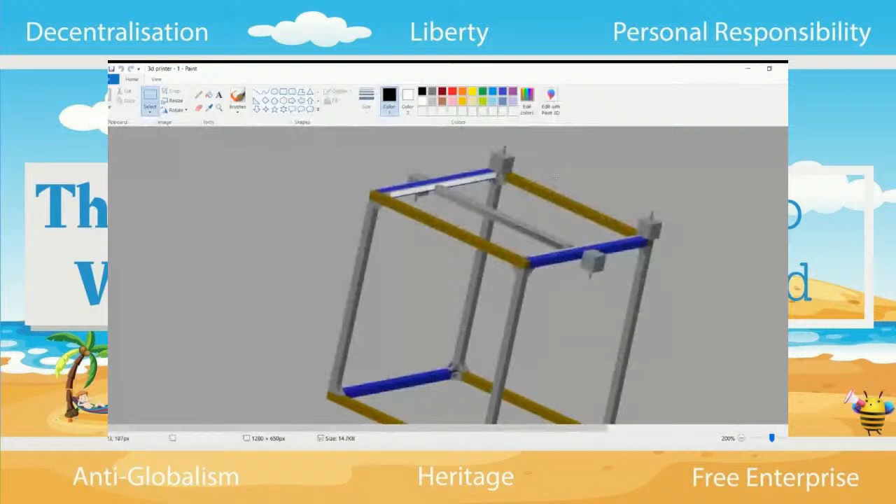Okay, you ready for this to go on screen? I thought it already was. No, it is going up. Oh, look, blank screen, is it better now? Yes, there we go. Right, now, failure number one.

It should have been common sense, I don't actually know why my little brain didn't work properly, but it didn't. Basically, when designing this, I got very carried away with the size of the bed. I was very determined that it was going to be 40 centimeters by 40 centimeters because everything you see is much smaller. Jordan, for those of us who are not really up to date on the phrasing and description of things, can you use your mouse to show us which parts you're talking about, please?

You're in luck, yes I can. So the bed is not actually on this picture. Can you see the little black thing dancing around? Good, so the bed is the bottom, the base.

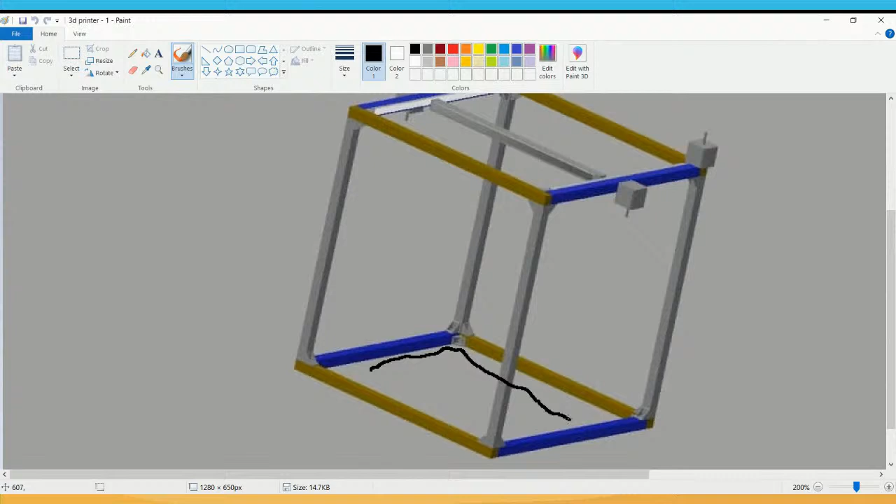Basically, yes. It's not rendered in this because I realised my failure before I added it in. But there should be a... I'm just going to draw this in, actually. There should be a bed around there. Please don't draw. Look at the... I'll tell you now. Oh, God!

Bob Ross ain't got anything on me. Hey, look, I won our game of scribbles.

The bed ought to be there. The mistake that I made was I decided the size of the frame before looking into the size of the bed.

Bed size, it's not terribly important, but they don't come in that size. So I then hunted around and realised this mistake. I then found out a couple of other things. There are different types of beds. There's basically three.

There is your bog standard plain aluminium bed. You print straight onto that, all is good. There is then your heated bed, which is what I was attempting to get.

The heated bed comes in two different guises. One's called PCB heated beds, and the other is basically a silicone mat that sits atop the aluminium sheet. You then print either directly onto that or onto glass placed above it. The PCB bed, for large-scale things like this, isn't very good because they burn out quite quickly.

So it was okay, fair enough, lesson learned there. I then settled on getting a normal aluminium sheet, which you can get in any size.

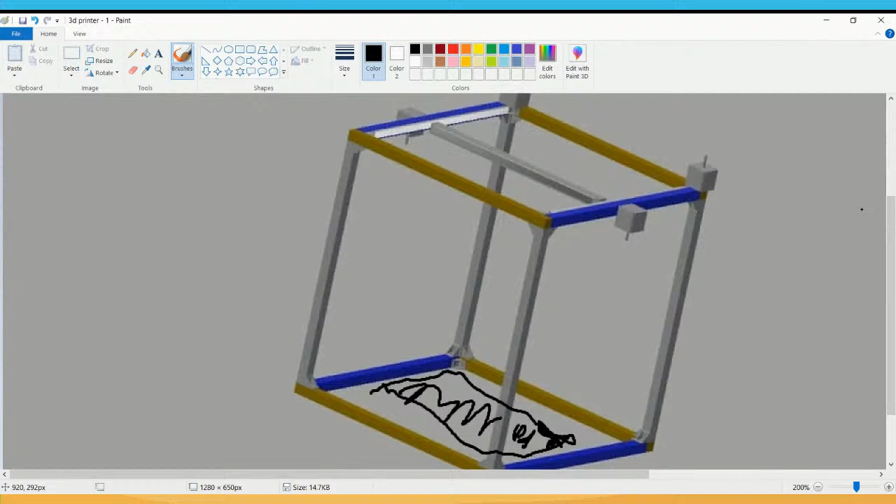The problem was, I built this in... Actually, have I built this in such a way? I may have not broken this as badly as I thought. This would act... No, I'm actually a genius. I've not broken this. Yay!

Explain. Okay, the reason is because these here are on the outside. This is obviously a little confusing, I don't know why I thought I broke this. It's going to work just fine, it doesn't matter. Anyway, this here would have a rod, a very straight rod, as you can tell. This would have a rod going straight down it, and it would attach onto the bed.

All I need to do now is put in a little mount, which I'm going to show you in a moment. I've actually rendered the next version out properly. This would work just fine.

You can't keep drawing this. What do you mean? This is working wonders. It looks like two bits of string. He's having a good time. At least I can't see him. I don't know, chat, what do we think? Are we dealing with the next Tony Hart? I'm thinking no. Maybe Morph. What, Inspector Morph?

Oh, God. I have to wonder, we're mental, and people who turn up for these streams are clearly mental too. So enjoy, everyone.

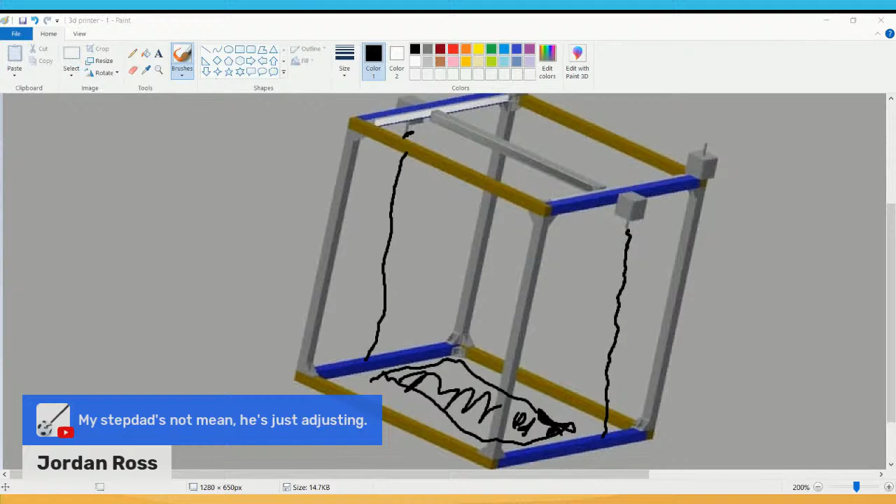Jordan Ross. I will say, Bob Ross does a mean tree skyline. Can you tell what it is yet? No, that's the problem.

You're just jealous, this is your issue. The worst part is, I'm going to make this slightly worse somehow. I don't know how this is possible.

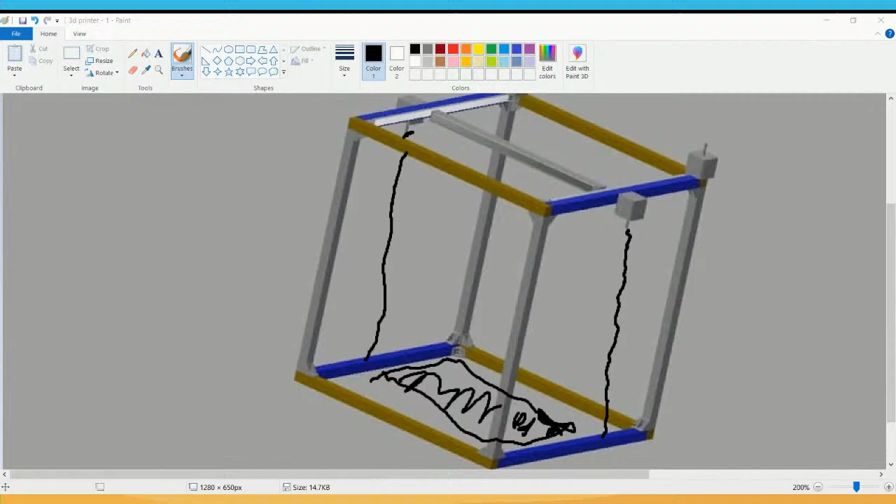No, I'm using a pen, so I'm not using a mouse to draw. I actually have a little stylus. This is my legitimate attempt at drawing, this is with everything going well for me. This is the saddest thing. If any of you have ever used MS Paint, and you don't use it a lot, you probably use your mouse to attempt to make something resembling something. Jordan has a pen. And this is the result. It's going well.

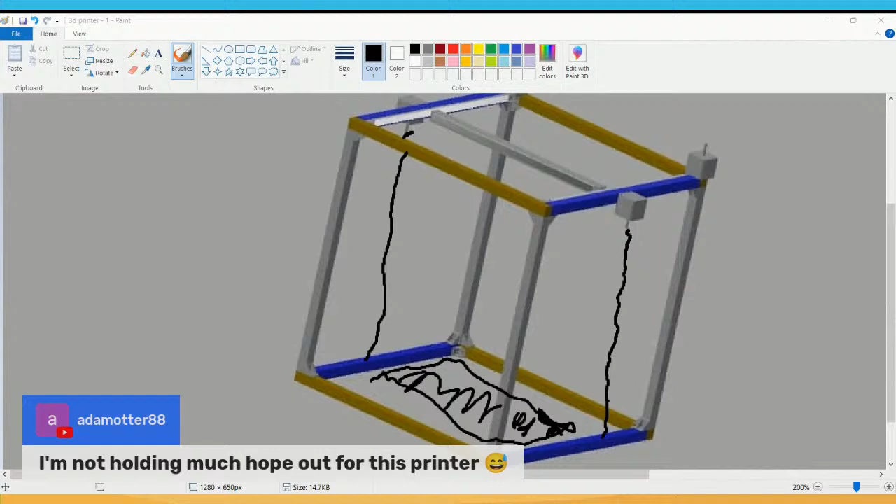You're very skilled at some things, dear, but drawing is not one of them. Adam's not holding out much hope for the printer. Adam, just be grateful he's not drawing the printer, thank goodness. So we should thank God for that, okay. The printer is not being drawn. Oh. Roy's suggesting it's an uncomfortable tampon applicator. Actually, to be fair... don't do it, ladies... to be fair, I think this would win that prize. Oh God.

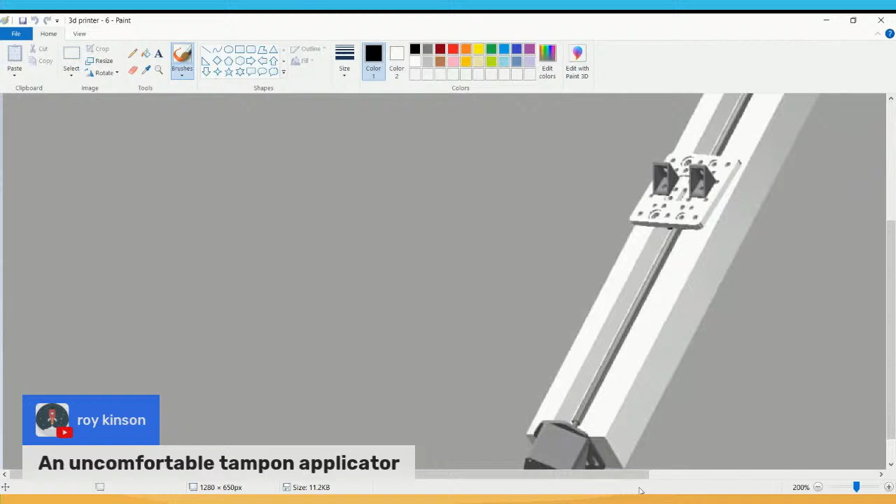See, the first one was actually the first attempt I've ever had at using any sort of CAD software with a genuine attempt at making something. This is now the second.

But ignore this line, that is ruining my picture. Can't you just undo it? Was this your first attempt at drawing? To be fair, it may well be. I can't remember if I got an F or D in art when I was 11, I swap between the two depending on what sort of day I'm having. I think I got a D. I think this is going quite well. It should be a P. Please stop drawing.

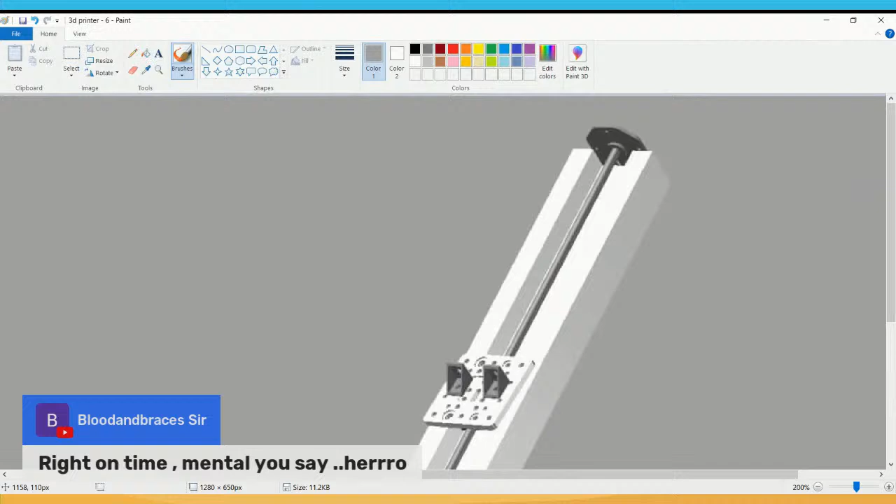Anyway, this is the second attempt. This here, I think, if I was to put this onto the outside of the previous picture you saw, because this here is the stepper motor.

Oh, flipping out, I'm in grey. Let me catch up while you're doing that. Blumberry, this here is the stepper motor. Good evening, Bird, Adam, and Roy. I think I may have mentioned Roy. Sorry, caught up, carry on.

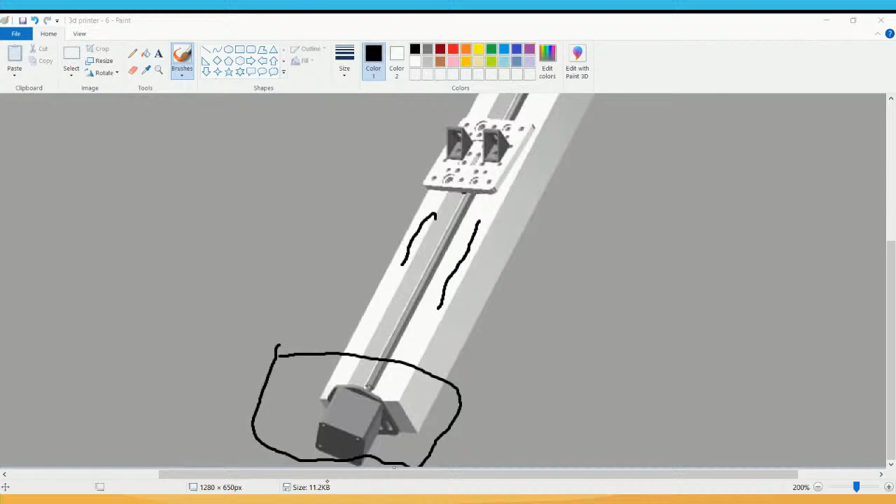What I'm thinking is, if I take that now, you can see how that works. This here is the 2020, as they call it. And that will attach onto the outside of the frame because the frame is also 2020. Right, don't save, go away. I don't want to save, but I thank you very much. These here are the stepper motors.

So I'm thinking if I just replace that and bolt that other assembly that I had onto the side of it, this frame will actually be just fine, which is a great shame considering I've put in a lot of work on the new frame. I have an update and it will look much, much better. I will show you as soon as I find it, which is right now.

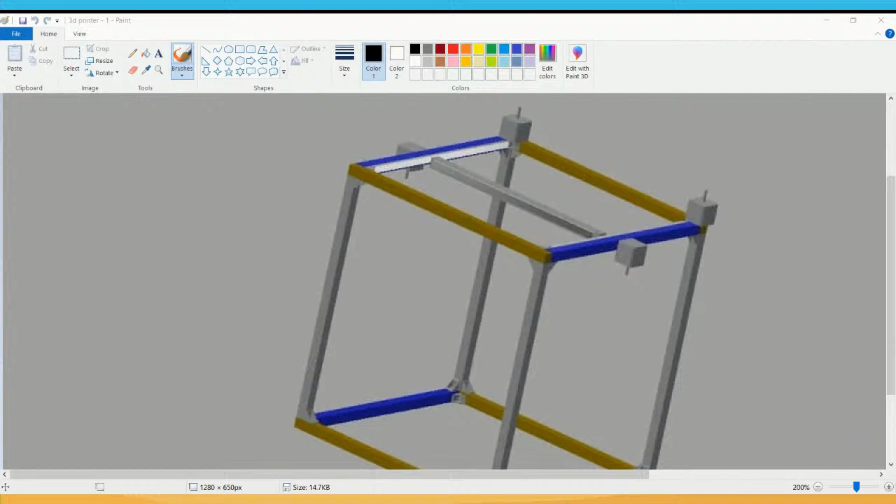Before you do that, I just want to mention, good evening Space Drone. Oh no, I take it back because he said Chuck's lemon. Oh no, that's nice because we do lemons. This is from Daffod: first print's got to be a WRT keyring from Whitland 3D Printing. Good idea, thank you for that. Keep that one in mind for when we take suggestions for the poll.

Okay, so back to the picture. Back to the meaning of life.

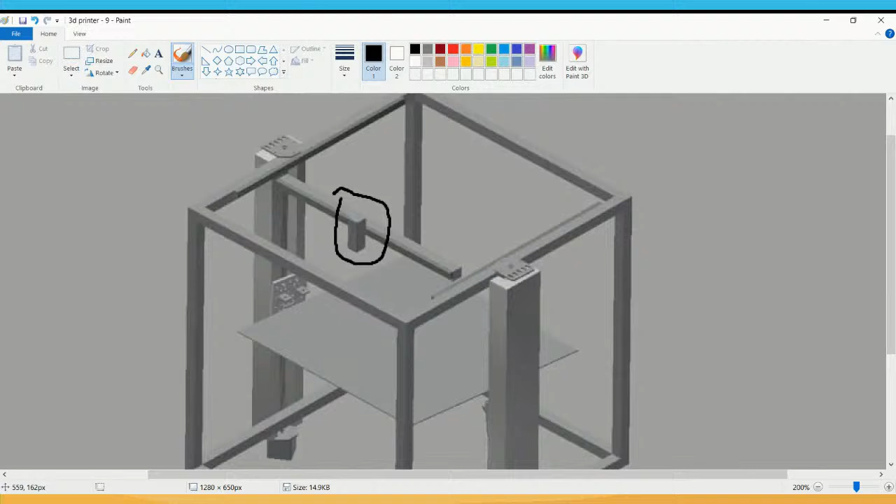Anyway, this here is the new printer, the new design. As you can see, much beefier, much sturdier. This little thing here is my attempted rendition of the extruder itself. Not terribly impressive, but it's just a little lump, but it'll work. It gets the gist across.

And is this the one that will move left and right? Indeed, this here is the X and Y axis, this part here, and this here is obviously the Z part. That moves it up and down. This here doesn't actually move up and down, and that is to increase speed and stability, allegedly.

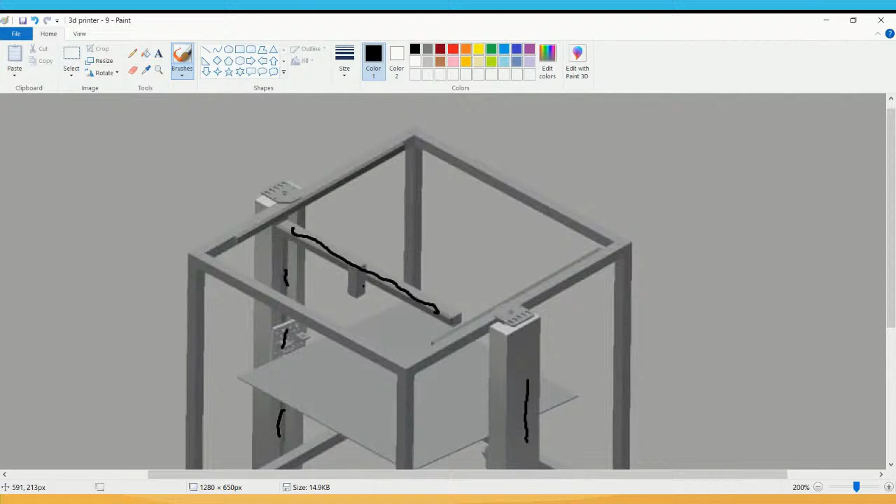Oh, Will has a question. He says, my big question about building this printer is, is it like assembling a computer from a few modular parts? It is assembling almost all of it from scratch. In terms of like a kit or anything like that, no, there are no kit parts here. It is just stuff that I've gone and sourced and found.

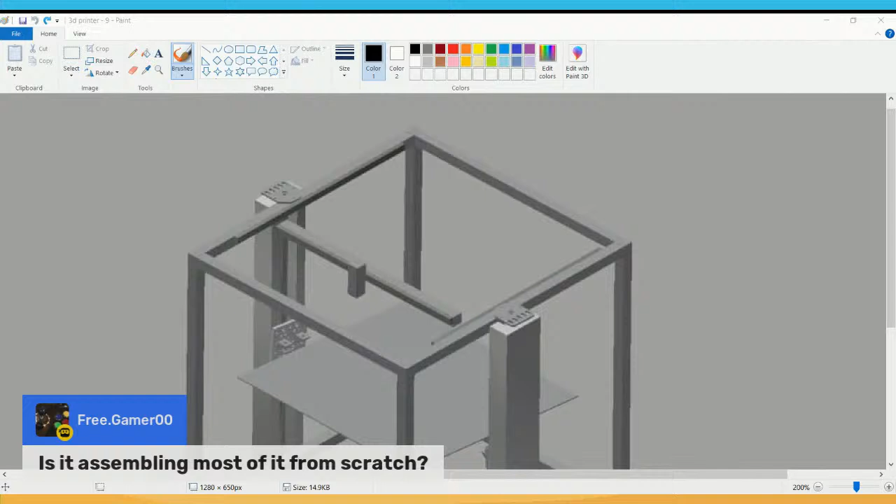The kit suggestion was a very good one with regard to using it as a guide, sort of the order with which you would put the parts together, but obviously common sense would dictate that you build it from the bottom up. But there will be a specific order to adding the parts.

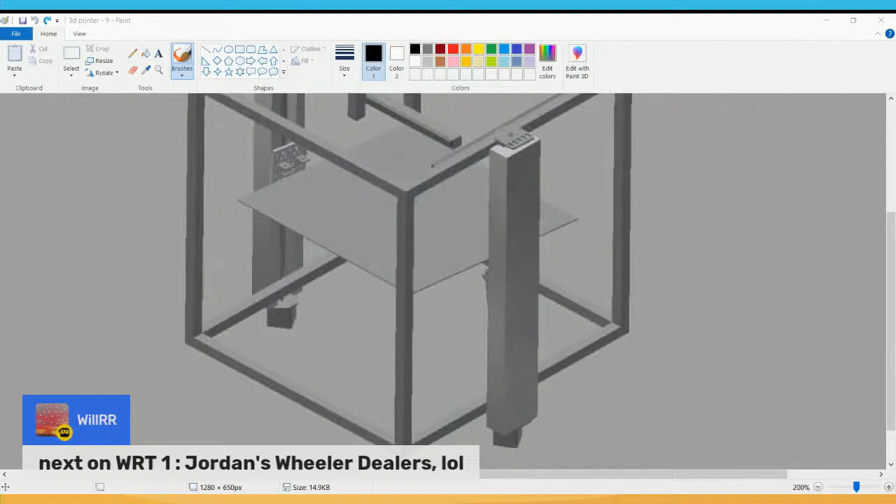Will says, next on WRT1, Jordan's Wheeler Dealers. There you go. So yeah, we did look at the kits as a guide, but Jordan's adamant that the process of building it is the point of the whole thing. Exactly, we want to build it, we want to work out how it works and all the rest of that.

So yes, that is the new design. And that plate, is that the base plate you were talking about? Sorry, the bed, yes. This part here, that's the bed. Okay, and that would travel up and down.

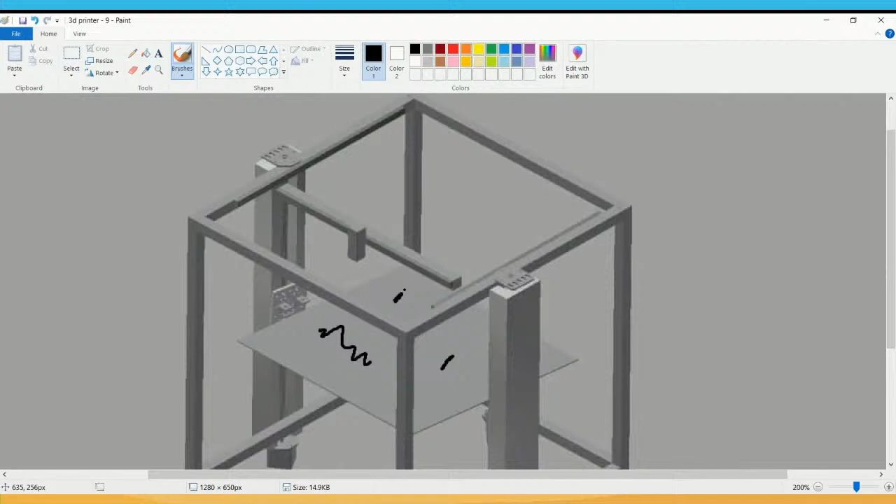As I said, if my program was working on my laptop, which it isn't for some reason, I would be able to show you and wiggle it around and make everything move. It would actually be quite impressive.

But such is life. What I haven't added on to this, because I was busy working out various other issues, is this part here, the bed. It's kind of tricky having that move up and down, because it's not something that terribly many printers have. And if they do have it, that's the Z-axis as opposed to the head itself, they don't actually show you how it connects to anything.

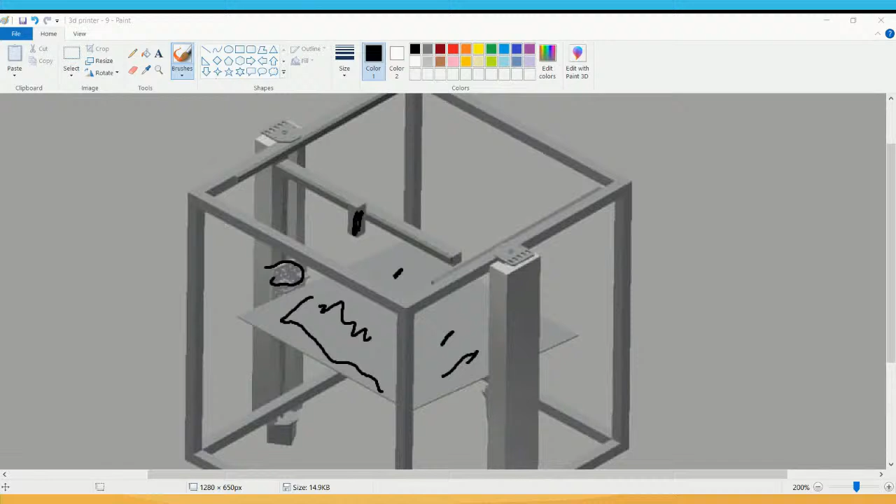So I've had to work out a weird little system, and that's what these parts here are. I do have a picture of those zoomed in. These here are actually quite complicated, and I did model these myself, apart from the plate here, because it was a bit complicated. Not so much that doing it was complicated, but there's lots of holes and they need to line up properly, so I just got the CAD designs from the manufacturer itself.

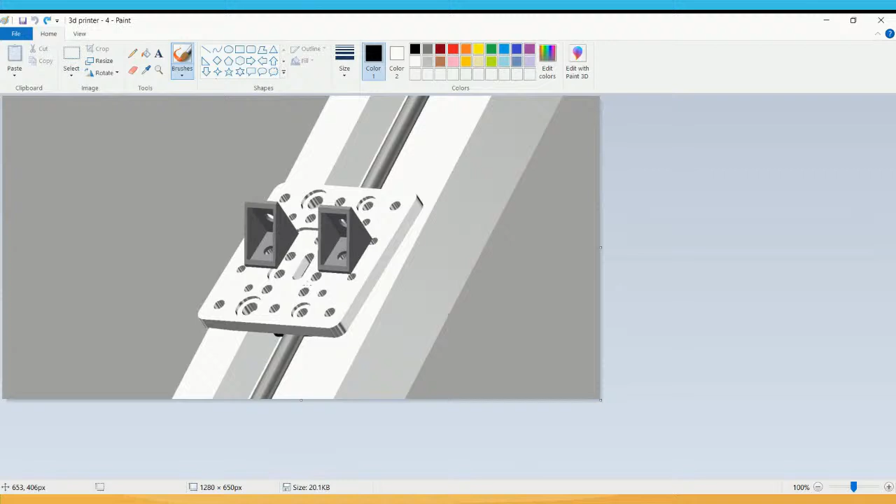The way this works, underneath this there is a little... I can zoom in for you. There is an anti-backlash nut, which is a very fancy term for a nut that is under tension and basically pulling downwards against the screw.

Backlash is when you have... actually, that's not a good drawing of it. A backlash is when you have a cog system that has air in it. Because they all need some amount of air, but obviously if you've got a tooth coming into it, you want as little air as possible, because there would be backlash.

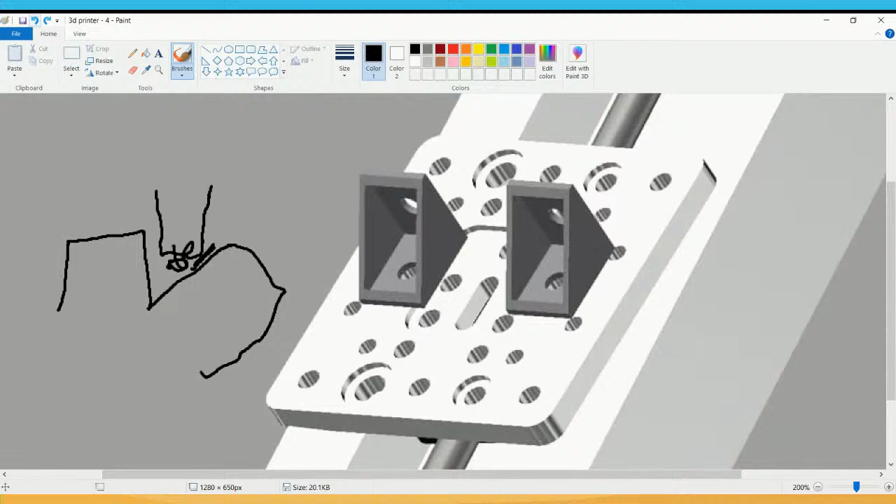So this here is a special little nut, and it takes all of that out, so the movement of it will be much more consistent. I now need to work out a way, and I'm just going to do it with the extrusions, where something can sit on top of these, and then connect into the bed. The bed will basically just be resting on top of it, balancing there.

I hate to break your flow, but I've got another question, or rather a comment, and I want to stay on top of these. So this is from Will.

He says, there's no kit for a computer, but it assembles itself without too much room for error. I think what he was asking was, is there a lot more room for error with building this from scratch? Yes. Putting together a computer is relatively easy, so long as you're not...

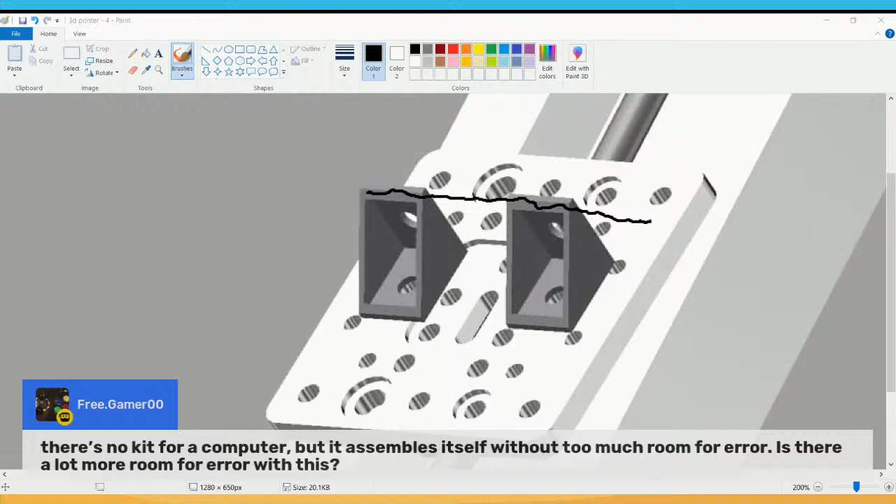I was going to say being stupid. It isn't actually being stupid. So long as you're not trying to put like a... what's the red company? I want to say Asus. It's not Asus, the red company. I don't know what you mean. In the world of processors, there's red and blue. Intel is blue, I can't remember the name of the other ones. I've only ever heard of Intel and AMD Athlon. AMD, thank you, I couldn't get that. Well done, thank you, love. Well done, AMD, tech boomer. So long as you're not trying to put an AMD chip onto an Intel motherboard or vice versa, all is good.

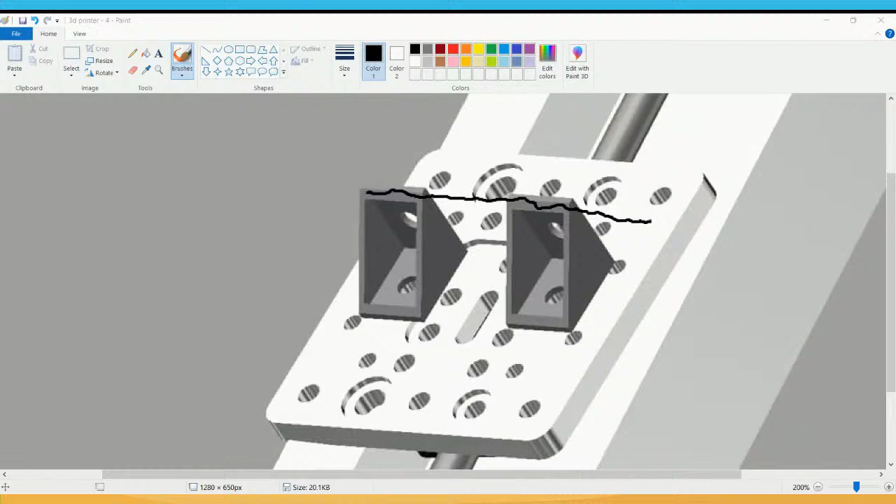Effectively, I can't believe I knew that. I'm so pleased with myself. You did well, I just couldn't get there. I could see the company's name, I could think Threadripper, and that was it, it was all I was getting.

Roy says a fair point regarding not using the kit, and plus there's no comedy in assembling a kit. Roy's just here for the chuckles, I'm just starting to suspect.

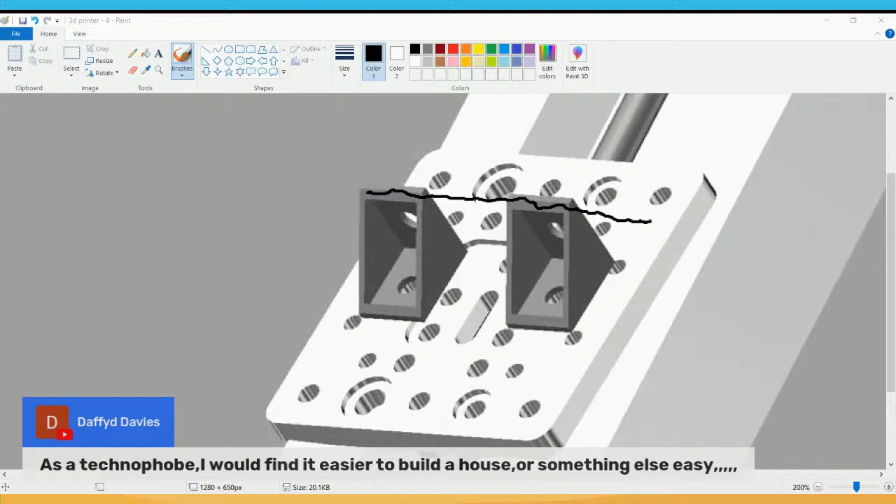Daffyd says, as a technophobe, I would find it easier to build a house or something else easy, compared to this. I suppose if you're not technically minded, those things would seem easier. I mean, building a room, it's four walls and a ceiling and a floor, it's pretty self-explanatory.

And just catching up on the chat. These sort of things are fiddly rather than complicated. I think, is there a conversation we've missed?

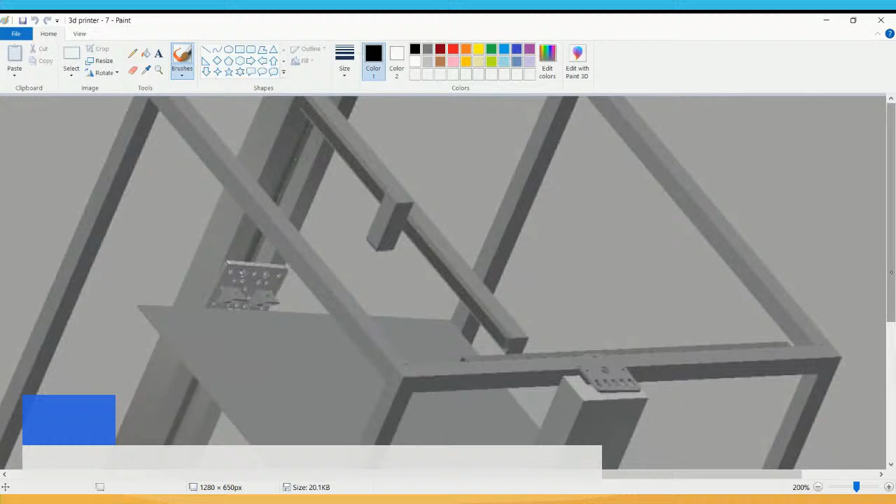Roast chicken, says Sir Francis, and custard cream, says Philomena. Someone's got a teapot out, that's what I missed. English Will says it's the sexy fantasy woman. Sexy fantasy women drink tea.

Okay, that's very weird. By the way, everyone knew it was AMD, everybody knew. Yeah, I just couldn't get there. Space Jones says you couldn't fit them anywhere, you couldn't fit them anyway, the pins are different, I think. That was in relation to what you were discussing. I'm sorry it took me a while to get there, but I wanted to mention Will's question.

I thought you could fit them. I suppose the pins would be. I have no idea, I've never tried.

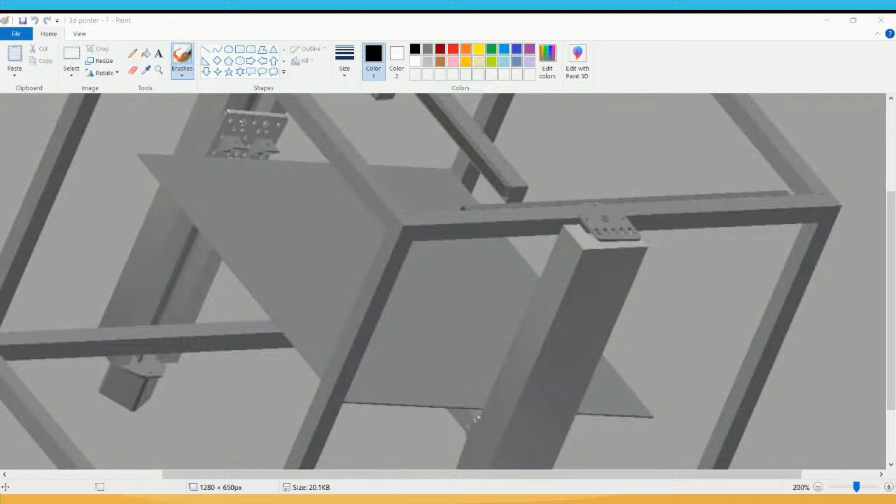Well, this will be a lot of trial and error. Oh, this build itself probably will be. There are certain parts I know I'm not going to be able to do well at the start. I'm actually going to need to get this up and functioning so I can print off a couple of parts, and that'll help with the stability of it. Question from Daffyd is, how does the computer thingy tell the printer thingy what to do?

This is something I myself am not terribly sure about. In terms... Roy knows the answer. Roy would know the answer. That's where the string comes in. Yes, the string does it all. You leave my string alone.

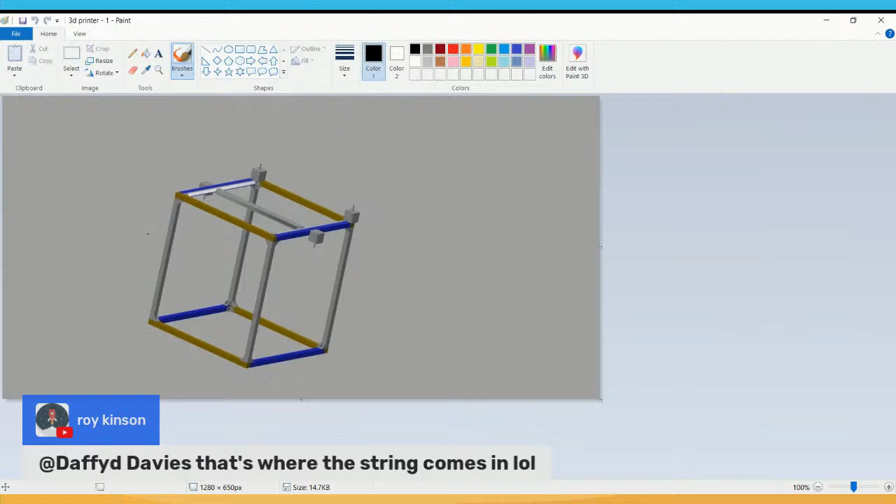In terms of how the actual mechanics of it work, basically, I'm coming back with the string, and I'm getting different color string this time just for show. Look at you showing off. Thank you very much. Basically, this will come off. I'm going to put in like a little blob thing here.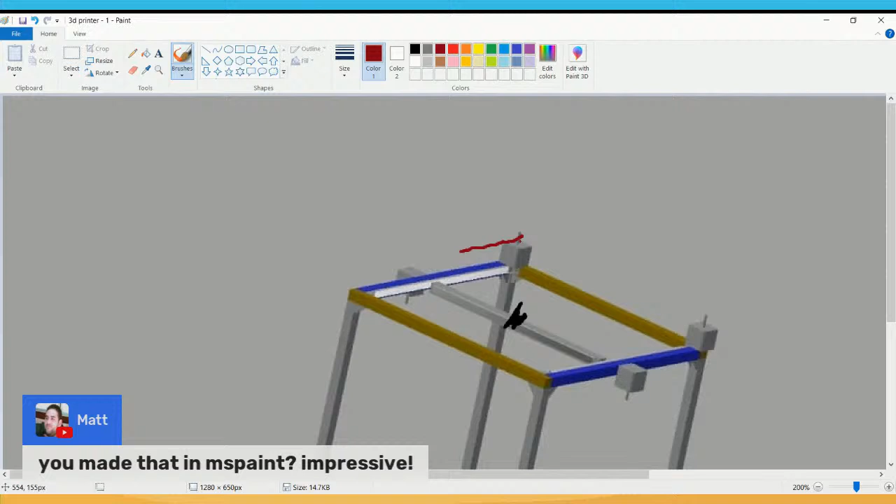The way it works is these here are going to be driving some belts. The belts will then loop around this machine in a relatively extravagant way and end up in this sort of weird shape. And as they move back and forth, these will spin. So by these, I mean the stepper motors here will spin around and they do their thing. And that will pull tension on the belt and loosen it off and various things like that.

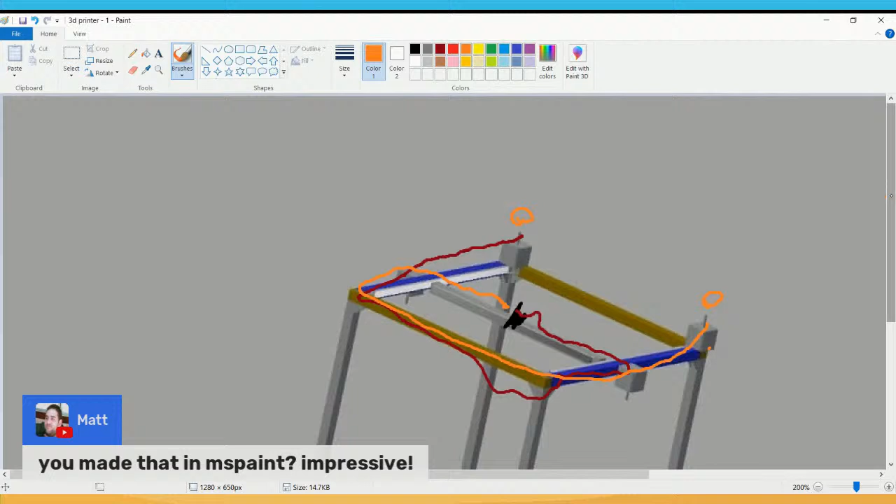How you drive those are via stepper motors, which we covered briefly in the previous thing. How exactly the computer talks to the stepper motor, I'm not entirely sure. It seems to be quite a straightforward thing. It seems to be quite easy.

On a large scale, in actual CNC, they use something called G-code. G-code is, frankly, an abomination to the eyes. I'm just going to go grab an example, and you can have a look at the joyous world that is.

While you do that, I want to say good evening to you, Matt. You said you made that in MS Paint. Impressive, thank you very much. I did not make that in Paint. I wish I did, it would have been slightly better. My stepdad suggested CAD, but you mentioned CAD before, didn't you?

Indeed it was. Philomena says, I can see tumbleweed while Jordan is talking tech. Only if, Philomena, you think there's tumbleweed while talking tech, get a load of this. Oh God. Oh God, that's G-code.

Now, I'm not going to explain how G-code works because I don't understand it beyond the very basic idea. But basically, you've got your X and Y coordinates here, and you've got your Z coordinates. These bits afterwards, like the F, the I, and the J, relate to the tool itself, I believe. And the G1 or G01, G02, G03, I think are commands - so that would be left, right, up, down sort of thing, I believe. That is how CNC machines talk to the cutter. How that talks, I have no idea.

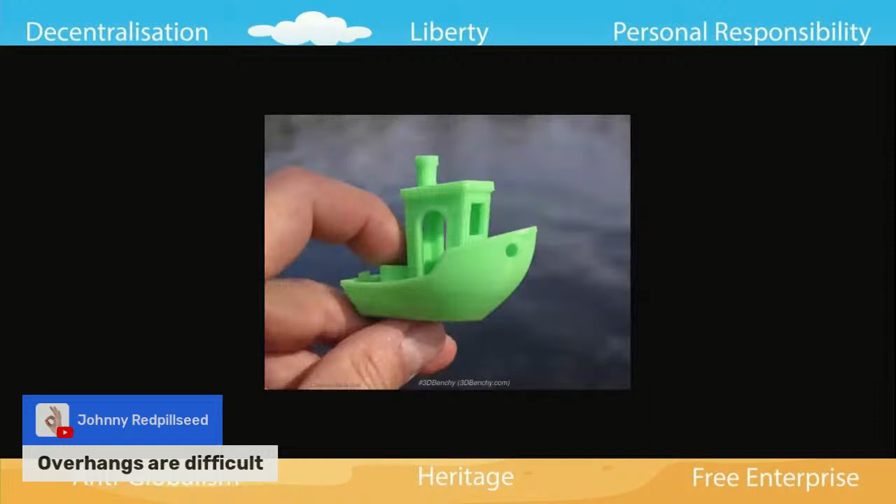And Johnny says overhangs are difficult. I did look at dual extruders, but when I started looking into these, people kept saying they're good, they're useful, but they don't use them very often. And that is the little boat, affectionately known as 3DBenchy. That's so cute. It is, this has actually come out really bloody well, this one.

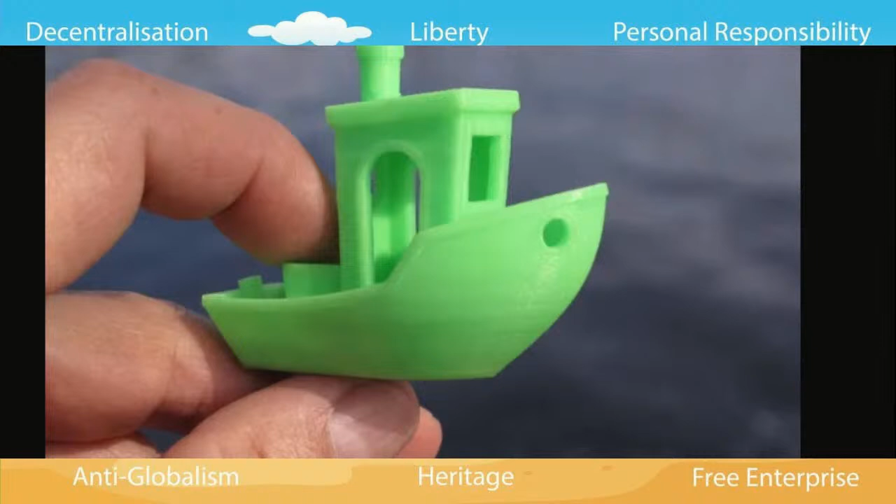As I said, it's the sort of thing you'd have had as a kid. I think I actually did have something very similar to this as a kid.

Will says, I also want to shout out Andrew's made some beautiful leather work and posted pics in the Discord, check it out. If you haven't joined our Discord, there's loads of information there, pictures and descriptions of projects people have undertaken. Andrew in particular, with the leather work, started from scratch, never done it before, and the detailing is amazing.

Philomena has done the same, she made teeny tiny clothes and they were just beautiful. What was the making name of stuff... I'm asking a question, Philomena, what was the name of the little Time Lord man? Carry on.

Is Joe broken? No, I was just reading the chat. Space Jones says, what kind of pics is Free Gamer sending, and is suggesting everyone go to his Lonely Fans. That's mean.

Yes Johnny, kudos to the craft folk or crafty folk. We have so many people with skills that I don't think people are very confident, and I do understand that, doing something for the first time and sharing it with people.

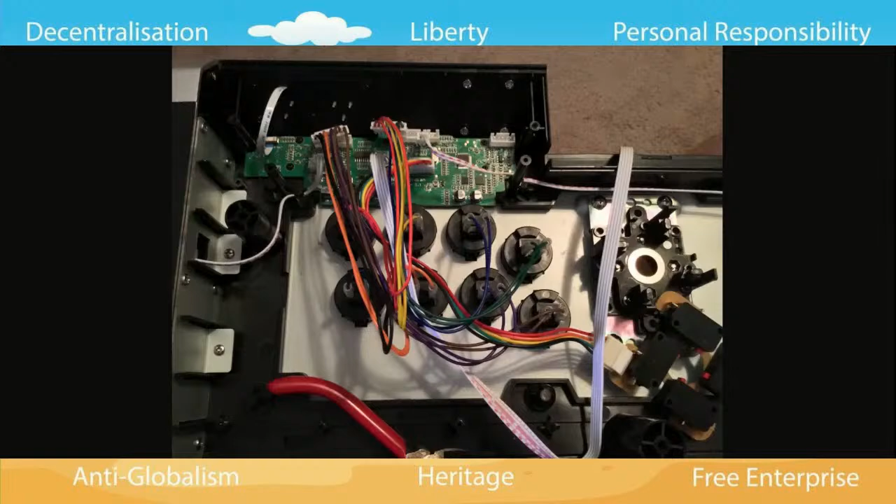That's right, it's pretty much monkey proof, you just do plug and play. You see all those little plugs on top, those you just kind of pull out and put back in. What is that, though? That's the inside of a joystick, and those little black circles are behind the buttons. Look at that, the area on the right is where the stick itself goes through the chassis, and the part on top is the control board.

And that was what I swapped out. Or not so much what I swapped out in my case—I guess I did swap it out in my case. But what you really can do is add a secondary board that lets you interface with additional devices.

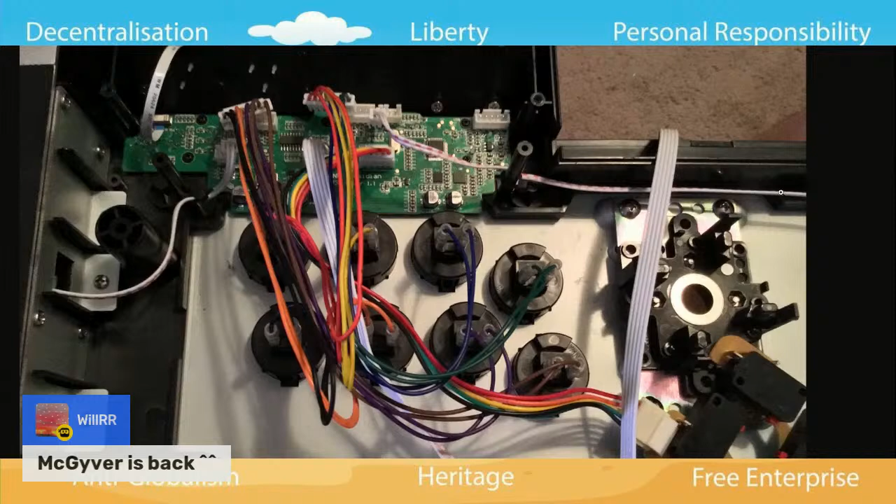Because one of the problems with gaming is, especially if you like to use a console, the devices are not compatible with each other. Since the days of Sega and Nintendo, you can't use your Sega controller in your Nintendo console. Today it's mostly Xbox, PlayStation, but there's also still Nintendo, Mac, PC, and a lot of older systems too. Now there's newer ones, the PlayStation 5, there's all these different ones, and you could end up buying controllers for every single one, which is really not a cost-effective thing.

But you can get a control board, and that's the link I put in, that I sent to Jordan. It pulls that up. I don't have any pictures directly of that, I didn't want to actually open up the device. These are old pictures I already had from when I did the work originally.

You put in a replacement control board or a secondary board, and what that does is it lets it work with every console. Oh, that's good. And we also know it improves performance.

They keep bringing out these generations of consoles, and some will be compatible with the last generation, but none of them are cross-compatible. Invariably, every second or third generation, you've got to scrap everything you've got and start again. It's a bit of a scam in that respect. So any way that you can utilize something that will work across the board, that's absolutely fantastic.

Think of the money people would save by doing this. I think that's incredibly useful. Think of the skills gained as well. Yeah, you're learning to deal with these sorts of things.

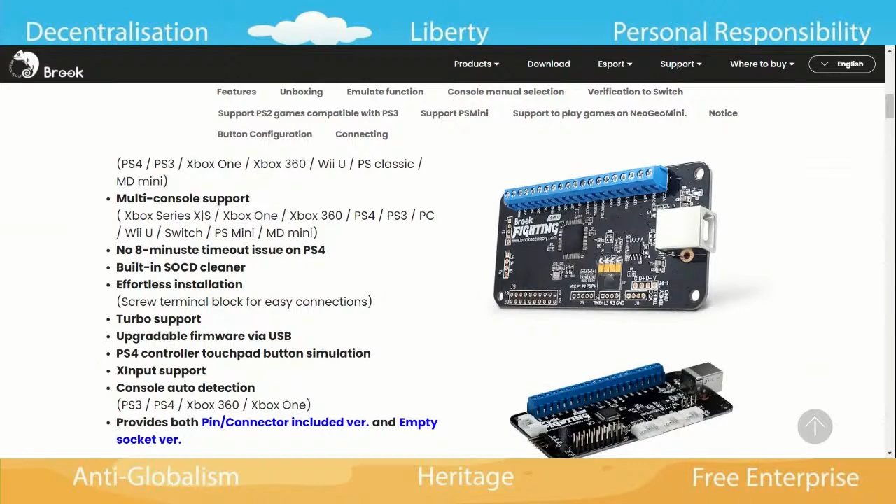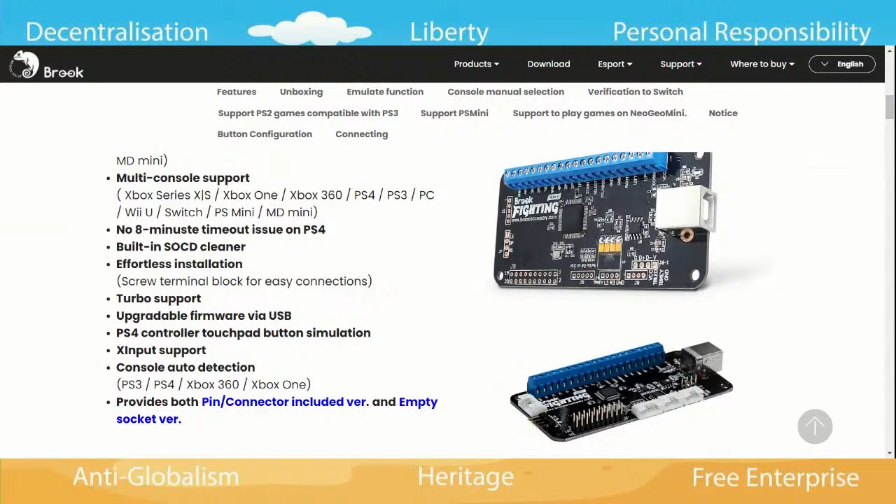What's nice about this is, especially if you look at this link here, I'm going to admit it, I use the kit. That's exactly what this link is for. It's $140 as opposed to, I think, $90 if you don't get the kit. And what this does is it already has some connectors included in the board.

So you can just plug in using the wires that are already in the existing one. The way it works is it works for a specific model of joystick. Because I had a very common, popular model, they made a kit, and I said, you know what, I'm not going to be a tough guy, cowboy, try to save a few dollars. I'm just going to get the kit. But I sure enough still managed to do some soldering because I was such a dope that when I was pulling it apart, I managed to cut one of the wires off. So I bought the kit and I still had to solder it anyway.

Well, that's still quite the project. You're very humble about this, but it's not something I could do. And I think for many people, it would be a massive task to take on. So well done. Thank you very much.

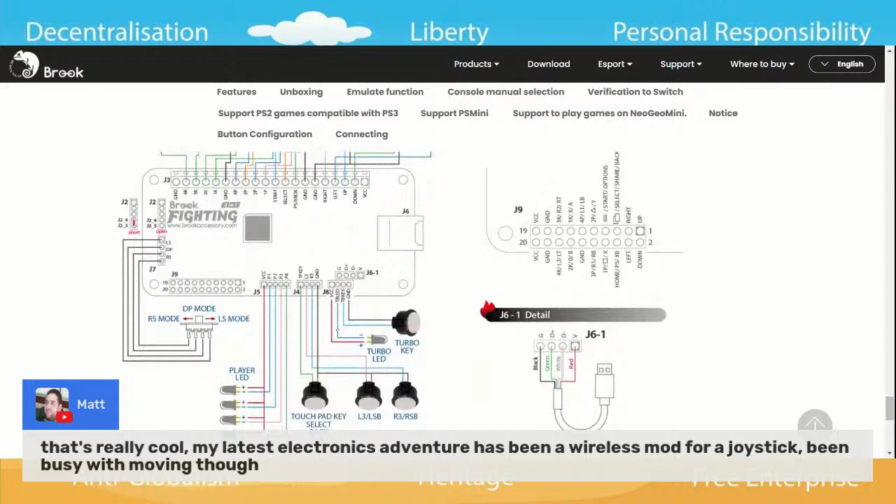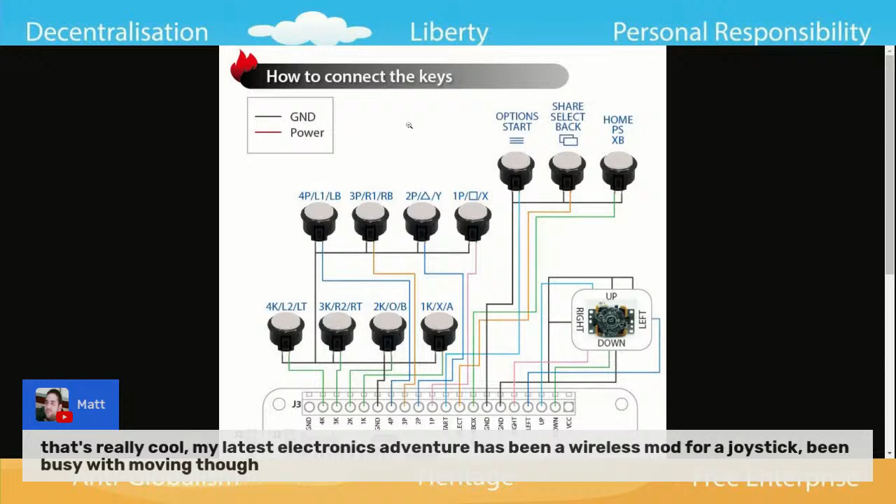I maybe I'm coming across a little humble, but I do want to stress that these devices are actually designed to be modular. They're intended to have the parts swapped out, and they're made so if a part breaks, you could swap it out easily. When you buy the stick, there's just 2 or 3 or 4 screws, and then you can open up that whole thing and get access to all the hardware. It's intentionally designed that way, and that's not to say there's no part of it that's difficult, but it's surprisingly easy to do some of it.

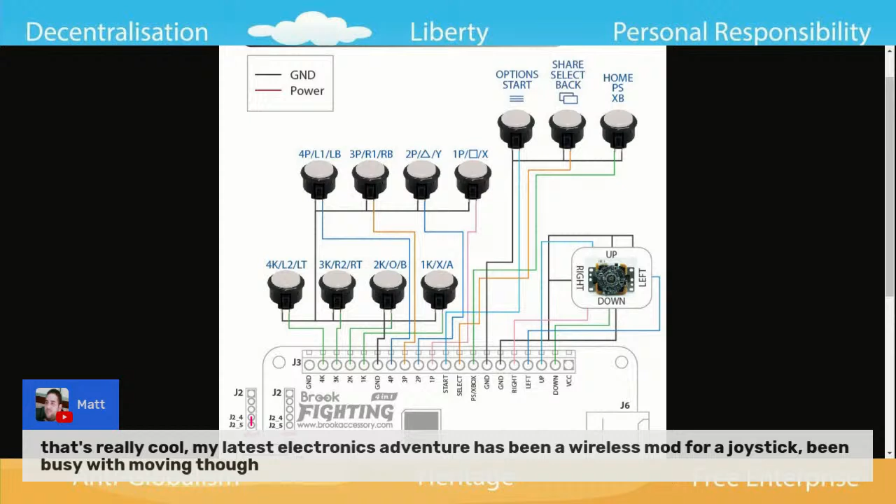Some of it's tough, especially the first time, because you don't know how much pressure to apply, and it's easy to break. Well, I don't want to say easy to break, but it's possible to break some of the connectors. And they're on really hard, so you have to really pull on them to get them off. Well, it's confidence again, isn't it? Practice makes perfect.

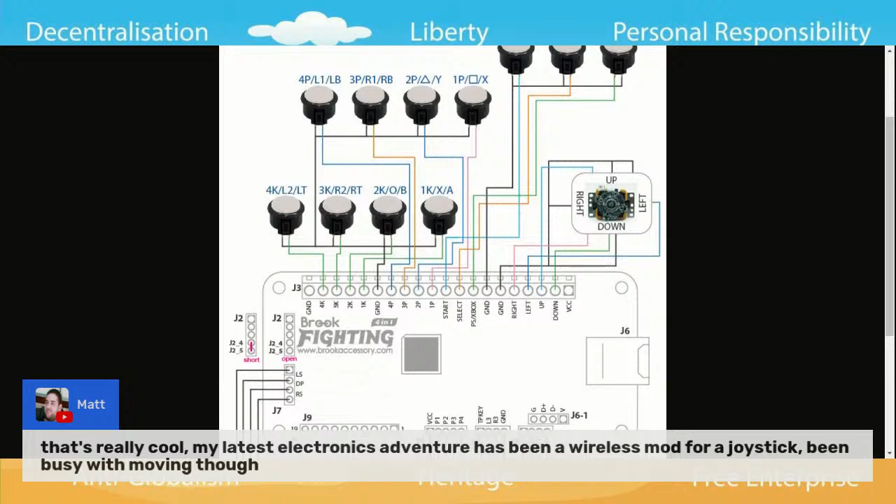Just on the back of what you've said there, Will, Matt says that's really cool. My latest electronics adventure has been a wireless mod for a joystick, but he's been busy with moving. Maybe Matt, when you get around to doing that, you'd come onto the stream and share that with us. We'd love to see it.

A wireless mod is interesting. Absolutely, I don't know what he means. I mean, I do know, but I'm not sure precisely. Does he mean modding it for Bluetooth or modding it for a specific wireless receiver, like they did in the old days, where you had the 2-piece device, where you had the receiver you had to plug in, and you had the controller.

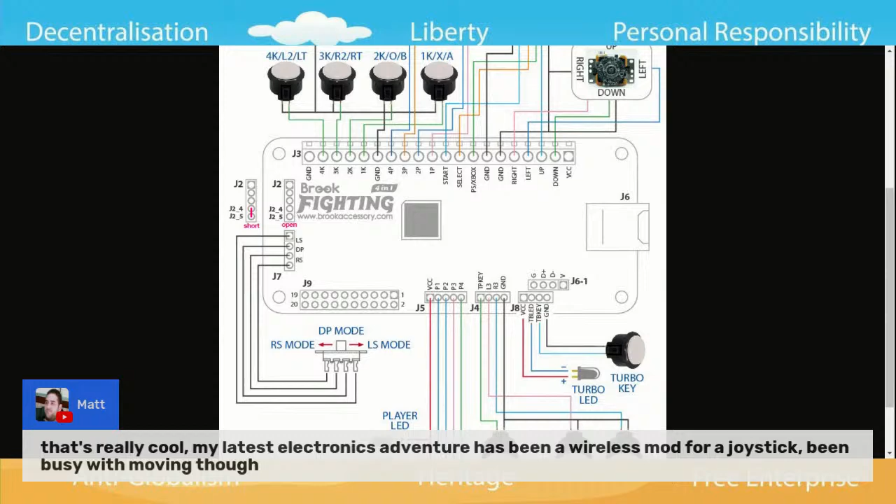So I'd be interested to know - Matt, if you can clarify that, that'd be great. SpacedDrone, while I'm working down the chat, says a cost-effective way to learn electronics is Raspberry Pi. And Arduino for drones. Let me actually share something about that in response to what SpacedDrone is saying.

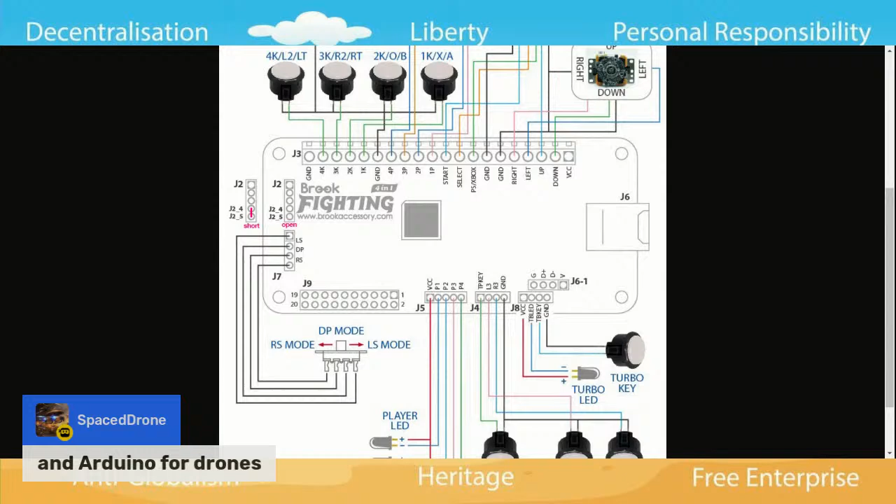I mean, he's right, he's not wrong. Raspberry Pi is a cost-effective thing. I actually don't know much about it personally, I just haven't tried it. I've never had the need because I already have - at least I used to - I will have again very soon a PC that does all that.

But with a Raspberry Pi, it's like a mobile device - the same chips as you'd find somewhere, and it controls a mini computer kind of, and that plays old games using an emulator. But there's newer tech that's much more interesting that I wanted to share with you guys. It's called a Mister, spelled M-I-S-T-E-R. This isn't what I did, but I've been looking into it. What it is, is a device that emulates all of the old consoles on one device.

The nice thing about it is, current things that let you do emulation - emulation is a way of making one device act like another, like you can make your computer think it's a Nintendo if you use emulator software. What this Mister device does is the emulation is much more accurate, because when you use emulation software there are flaws, there are delays, there are issues, especially for some of the older games, where those small delays can really make it difficult to play them. This new technology is such an accurate emulation it eliminates all of that.

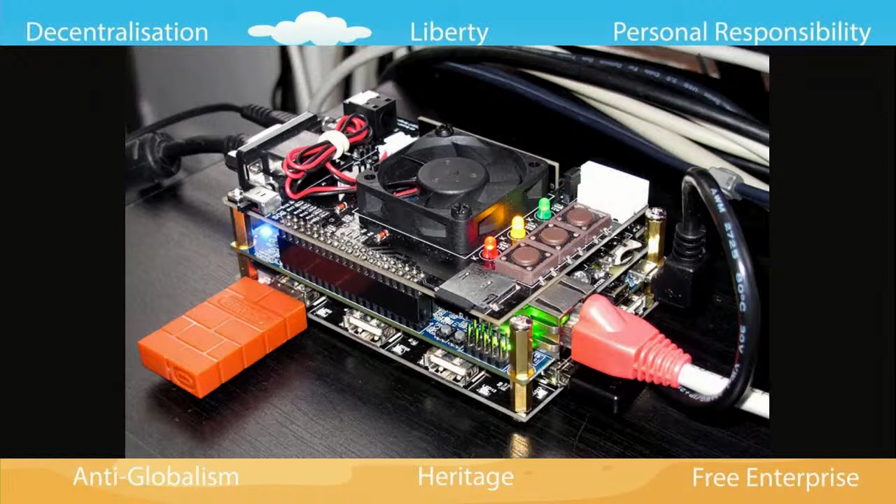And it's not that expensive either, it's like $200 or something. It's not a crazy amount.

In response to your question, Matt has replied - first of all, Matt says he would love to. We would love to have this on the show, Matt, so thank you for that. To respond to you, Will, he says it's an ESP32, Bluetooth or Wi-Fi. Okay, so that's like the modern style where it's a universal type of wireless.

Yeah, I'm a tech boomer. I've got nothing more - Jordan, take over. I'm not too expert on it.

And one other thing I wanted to mention also about the joystick - I'm packing a lot of information in here at once. There's a common standard that they use, I don't know what the name is for it, but if you want to buy an arcade style joystick, if you buy one that uses those standardized size parts, it's very easy to mod or replace it yourself. So it's a very good thing to buy because it'll last forever, since you can keep replacing the individual parts as they break. It's a good investment, and it also works on all the devices if you put it in this board. So I guess that's almost repeating what Joe said earlier about it being a good investment, because it costs some money up front.

It's going to be like $200, depending which model you buy - on average about $200 for the whole device, the chassis with all the stuff, and then you have to buy the board to replace in that. So it's a bit of an expensive upfront cost, but over time, not having to buy multiple controllers, it will save you money. It's also a really good project, I think, that you could do with young people in your family - your children, nieces, nephews, cousins - because of the nature of what it is.

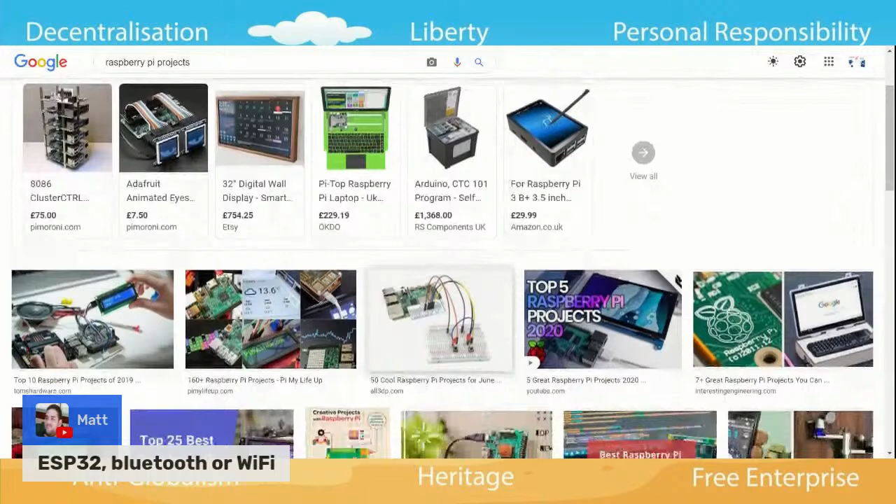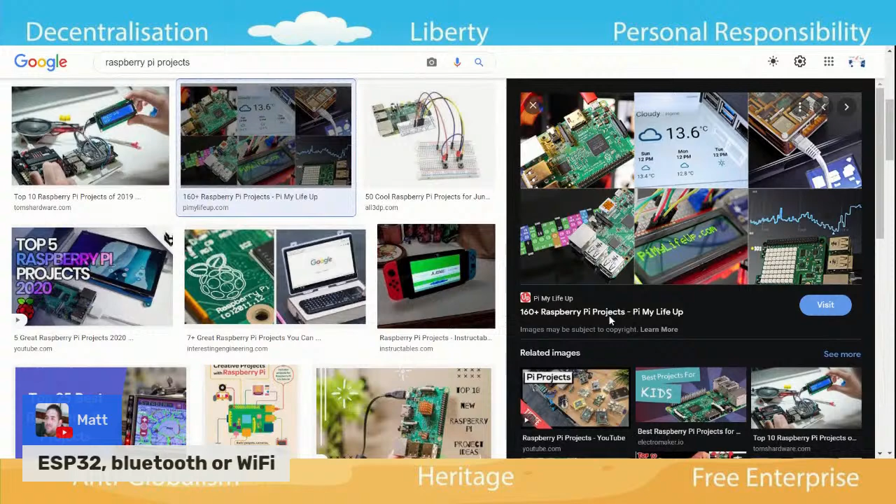Like the old radio-controlled airplanes and stuff, everyone loved that. Getting young people involved in these things, finding out how stuff works, how to break it down and rebuild it, I think is going to be a really useful skill for them in the future. It'll teach them the confidence that we're just learning now as old farts. These young kids are going to actually learn and be confident with it. By the time they hit their 20s, this stuff isn't going to faze them like it might faze someone trying it for the first time. So it's a really good mindset to instill in children - that the best way to maintain things is to find out how they work.

I think that's brilliant, Joe. Because I myself, growing up, learned how to use computers from setting up the computer to play games. If you wanted to play computer games back in the 90s, you couldn't just put it in the disk and the game would start. You had to go through a command line and change the settings on the computer. I don't want to get into too much technical detail, but you had to actually edit the settings, or the games wouldn't run properly, or usually wouldn't run at all. It required a lot more technical know-how than today. So if you wanted to just play a game, you had to be a fairly competent computer user, and that was a really positive side effect. My parents didn't even realize that, but that's part of why I think they continued to support me doing computer gaming.

Nice, I have a question for you from DJ Mark. Have you seen TronicsFix, Will? I have not seen that. Is that a device or a streamer or? I've no idea, DJ Mark, could you explain what that is please?

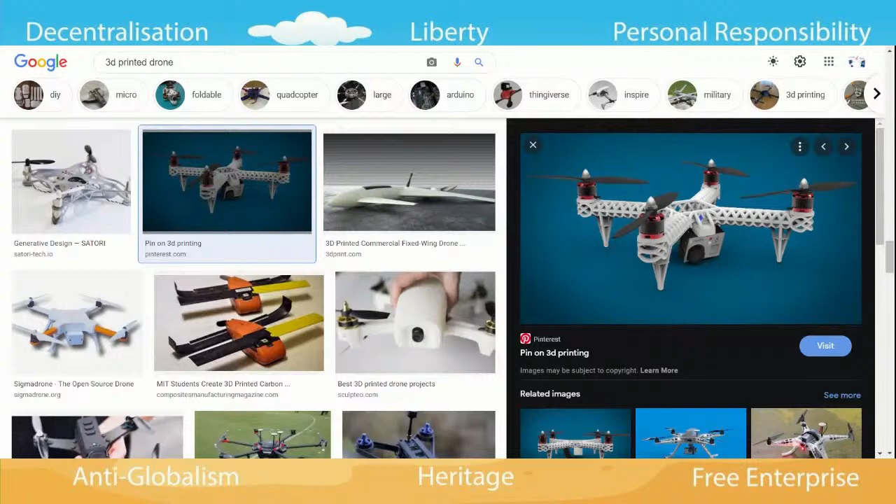Maybe one thing I do want to cover quickly because I found this rather interesting, on that Raspberry Pi thing it mentioned self-hosting Bitwarden on the Raspberry Pi. That's a bloody interesting project. Bitwarden is like LastPass, if I remember rightly. And unlike LastPass, it's free and open source and all that jazz. It's also very, very secure, meets all the same standards as LastPass, Surfshark and various other things like that.

Security being key, being able to self-host that on a Raspberry Pi would be very useful, to be honest, because you can see how tiny that little Raspberry Pi is in the picture. Imagine being able to carry something like that around with you, and then you turn up at a computer, forget your password, doesn't matter, you can plug that in and off you go. You can get your password back.

Well, that's what's great about the Raspberry Pi emulator devices, because you can have all your games on there, and you could just take it with you and have a large amount of everything you want. You just plug it into the television or monitor, and it's very convenient. It's a bit like walking around with a key then, and that basically applies to both of those concepts. Effectively, yes. Ultimately that's not how this is designed to be used - it's designed to sit at home on your network, and then when you need it you just connect into your network and off you go.

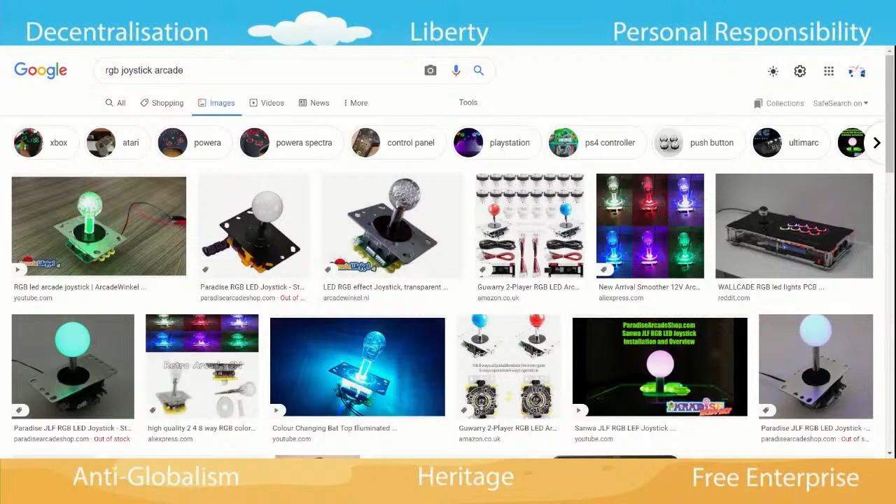All right, well you get - it's so tiny the picture, but you see the joystick itself, how it lights up in there. What is it with the tiny pictures? There you go, you see that, amazing. You could take it to the next level, because they don't make full kits for that - they make partial kits, but you have to do a lot of it yourself. You have to know some actual real electronics, because you have to hook up an extra power supply inside.

Now, down with kits, we should make everything ourselves from scratch. Yeah, you gotta. Well, you still buy the parts pre-made, but you have to assemble it the hard way. These LED light systems, I really like that one there too, it's got the trackball in the middle. You can get that as well if you really want to make a joystick. They also make joysticks without a stick now, because some people have gotten into it.

I know, right? It sounds dumb, it sounds retarded. So what's it called? A joy- I forgot what they call it. They call it like a hot finger or something, or they call it a hot box or a hit box. Call it a hit box. They should call it like a hot finger, I like that name.

So anyway, the hit box - it's for people who want very consistent and repetitive inputs, like some fighting gamers who've gotten used to it. They've actually won tournaments with them, and there's talk about banning them because they're pretty terrible if you're playing a game for the first time. But if you've played something for 100 or 1,000 hours, it lets you get very consistent inputs every time.

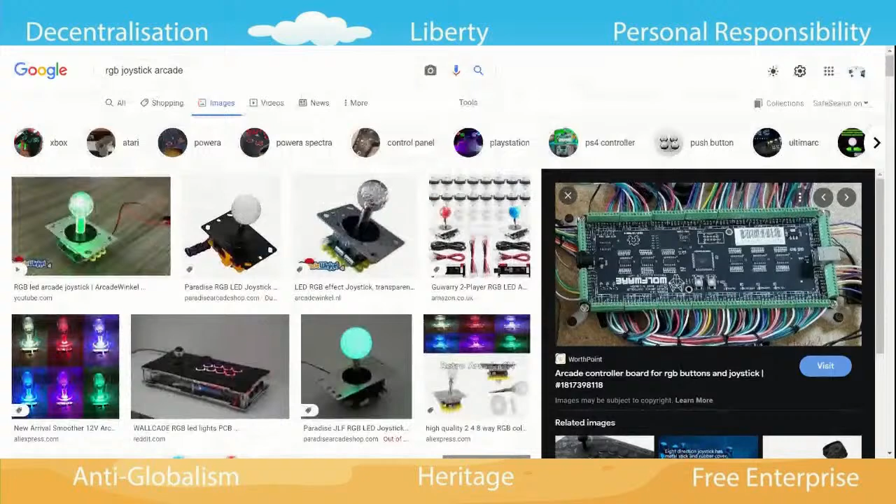You guys can tell I love this stuff. The flight stick - I don't know about putting lights in these and doing customization, but you can get some really cool stuff. You can build your own fighter cockpit using all this kind of stuff they got now, and they have driving ones as well. So you can get a race car cockpit with a stick throttle and a stick shift.

Aside from the fact these aren't as light and pretty, I actually prefer these because they're kind of old school, like a proper joystick. Oh, these are great, I love them. They're just only good for certain types of games. You can't control Mario with this, at least not very well. This is strictly for a flight simulator or a spaceship simulator, that kind of thing, or driving.

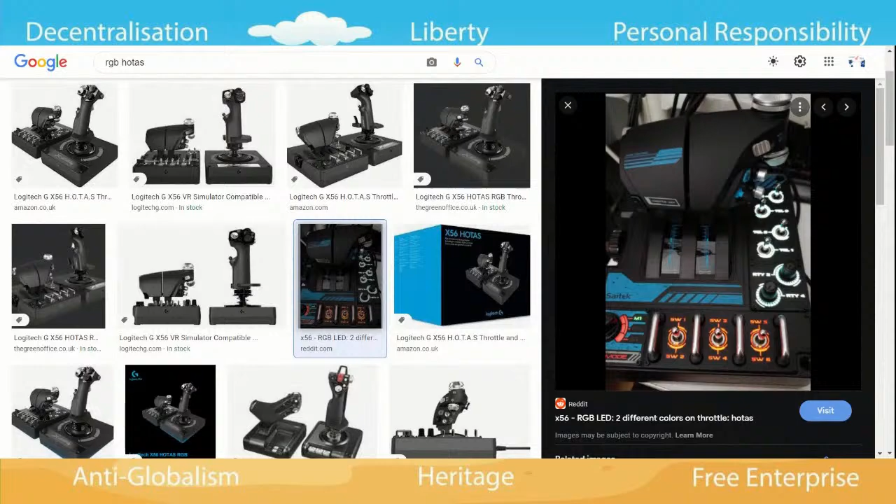Elite Dangerous. There's also pedals you get, so you can use the pedals as well.

I've always been kind of attracted to things like flight sims. I don't know why, I don't like flying. Maybe because that's as close as you'll ever get. It may be.

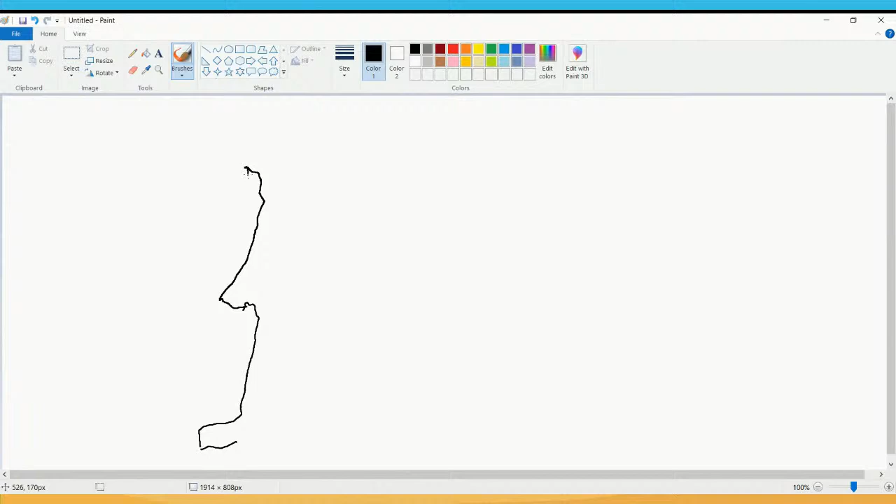Right, okay, here comes the drawing. I use that term loosely. Let's see what happens. What are you laughing at? Is this a quiz? Are we supposed to guess what it is? This is art, I tell you. Art. What is it supposed to be? Was it a very large fork?

I think it's a person. I see what it's supposed to be. Oh, it's a person with a really square head. No, it's not a square. Leave it alone, this side. Looks like the person's a little too big for the paper, a little too tall. No, that's perspective, isn't it? You're sitting down below. Is that someone's neck? What if they've got a tumour?

What is that lump? It's me trying to draw. I'm laughing. I want to say I'm really enthralled with the idea of a wood and leather grain and metal riveting joystick. I think that would be the coolest, poshest thing in the world. I would love it. I agree.

Andrew's back now, hasn't answered any of those questions though. So yeah, the Tony Hart thing.

Do do do do do do do do do do do. Is that the right one? By the way, I just guessed that one. Was that the Tony Hart theme, everyone? Can the chat tell me? I think it was, I think we got ET going here.